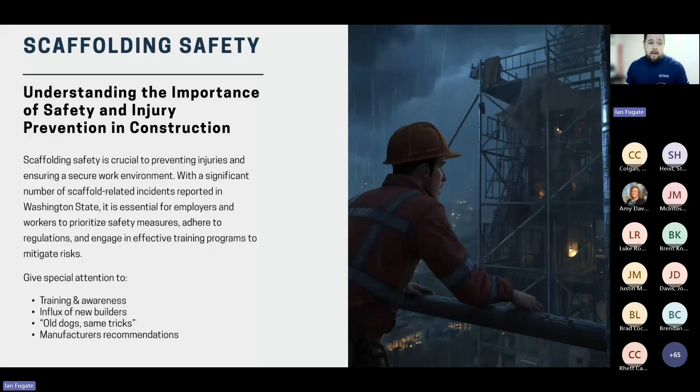And we're also going to talk a little bit about manufacturers' recommendations. It's something that I was talking to Steve about before this presentation, making sure that we understand that there are set standards that are separate from OSHA and L&I that these manufacturers have, and sometimes the guys don't follow it. And we'll touch a little bit on that, but one of the biggest things is tying off to the scaffold. Is it recommended, and does it meet the standard that we need it to meet?

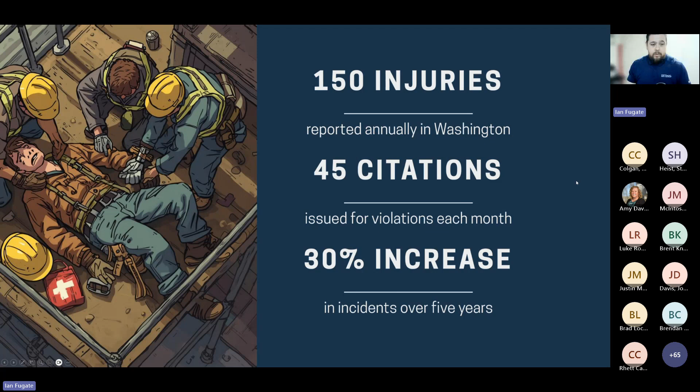Some quick statistics. Roughly about 150 injuries per year is what we see from the scaffold industry, about 45 citations every month. So it's just going to increase over time. Like I was talking about, we got an influx of new guys who are coming into the industry. I just spent a couple hours on the phone with some of my buddies in the scaffold industry, and I'm like, man, we're getting all these new guys coming in from the union. We're seeing a shift in the people who are trying to get into construction, and they see that they're going into scaffold, and we want to make sure that they're getting trained, right? Because we don't want to see this increase of 25-30% of injuries every single year. That could really put a damper on our people that are out there, right?

So today we're going to talk a little bit about hazard identification, incident and accident prevention, more of prevention than anything. I don't like being reactive. I like to be as proactive as possible.

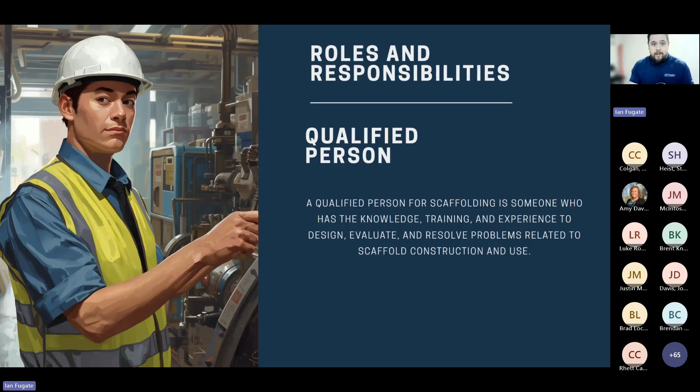They're going to work with the competent person, who we're going to talk about next, to make sure that the process is going smoothly. They're checking all the boxes and they're making sure that if there is engineering in place, the qualified person steps in and makes sure the competent person is doing it. This qualified person doesn't need to be on site, but they can be. They can maybe even double as the competent person that's there. But the competent person needs to be the one for sure that has oversight of the scaffold building process and makes sure that everything is getting done right.

And one industry where I definitely see a lack of competent persons is masons, brick masons, guys who are coming out, putting CMU walls up, and they're getting up there. The scaffold doesn't look put together properly, or they're missing guardrails. These guys don't have that kind of training. So we want to make sure that we're getting in there, asking those questions when we see the scaffold go up and say, hey, you know what? This doesn't look right. Who's your competent person?

Let's ask those questions, let's get that experience. On my current job site, a lot of people say, hey, this is our competent person, they have the experience, they have the training. But you get out there and think, I don't think this guy is qualified, let me ask some more questions. We don't want to get to that point because once they're on the site, you don't have that time, we're trying to balance production with safety. So you don't want to be backtracking. It's something you want to be very upfront with.

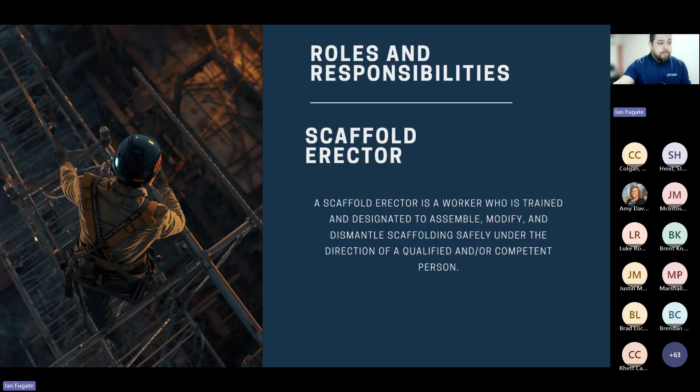All right, let's get into some violations. Fall protection, number one, right on the scaffold. It's one of the most cited things for scaffolding, not having the proper fall protection in place. What does that look like? A lot of the time they're missing guardrails, especially with bricklayers and masons, they don't have enough guardrails in the area. Personal fall arrest systems: anything after 10 feet, we need to make sure they're tied off somehow.

Is that supposed to be on the scaffold, or is it supposed to be independent? It really depends on the situation. We'll talk about that more, but there aren't many - actually I've been doing some real digging - there's no scaffold manufacturer that recommends tying off to the scaffold as a feasible means of fall protection. They really want you to be independent. The QR codes I have at the end link to two of the largest scaffolding manufacturers' building instructions, and in there you'll find it says we cannot say this is going to hold you, you should not do this. That's a big warning sign.

Independent lifelines are one of my favorite things to use, but what do you get? You get met with excuses - well, I need to tie off to here. Well, prove to me that it's okay for you to tie off to the scaffold. Don't be scared to ask those questions. They're in your field, you hired them to come there, and you need to feel comfortable asking, hey, I need to know that's going to hold you if you're going to tie off to it. Nine times out of ten, for a basic scaffold project, the frames or scaffold structure are not going to be enough to hold them if they suffer a fall.

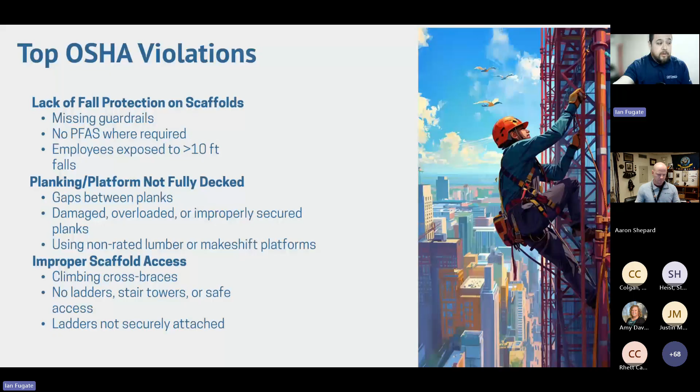Scaffold not properly supported. This is something that I have some photos of this. Especially right now, we need to make sure that if the scaffold is set on like a muddy surface or a surface that's going to absorb water, got to pay attention to erosion. We've got a ton of rain right now. So if you have scaffold on your job sites, you have any water runoff coming from the tops of the building, maybe there's a drain pipe that's near the scaffold, we definitely want to make sure that we're checking and inspecting that.

Scaffolding can't just have the base plates, the screw jacks, can't just sit on the muddy surface. If it's on concrete, we're probably okay. But we really want to see a mud sill underneath of that. And that mud sill is going to help, one, distribute the weight, and two, give that extra protection so that it doesn't slide around. The wood meeting contact with rougher surfaces like ground, it's not going to slide as much. So making sure that we have that, make sure you're checking it, check for any cracks.

We do not want to set on top of any kind of bricks. I see this one quite often. I wish I had some photos of it, but people will set bricks up and think that it's strong enough. The problem is they break and then it starts to settle, and then we have scaffold that can possibly collapse.

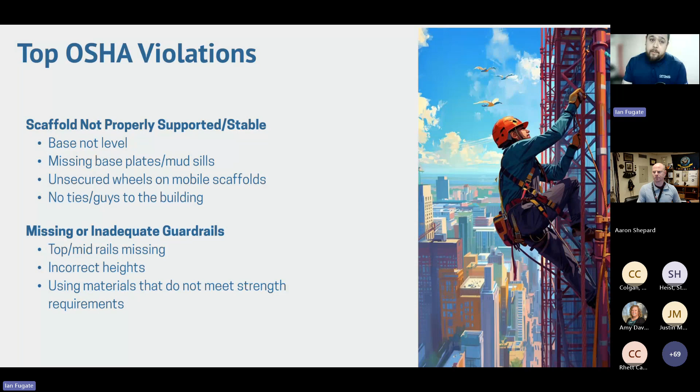Missing or inadequate guardrails. This is something very common, especially with bricklayers, mason guys. They'll only put one cross brace and then they'll start climbing and building. That's not okay. They need to have the railing in there to get rid of those fall zones in that scaffold. So we have an X brace, and it leaves this whole area wide open for someone to fall through.

And we've all probably heard these stories where someone's standing on the scaffold and they fall backwards. How did he fall off the scaffold? Well, more than likely there wasn't any rail there to catch them. They have a big X that's up here, the cross brace, but then they fall through that little area on the cross brace. So inadequate.

We want to make sure that it's there. If they can't achieve that, make sure that they're wearing some kind of personal fall arrest system: harness, lanyard, and they're hooked up to an area that the competent person and the qualified person have determined that, hey, we can tie off to here. It's good, it's strong, it's going to hold us up.

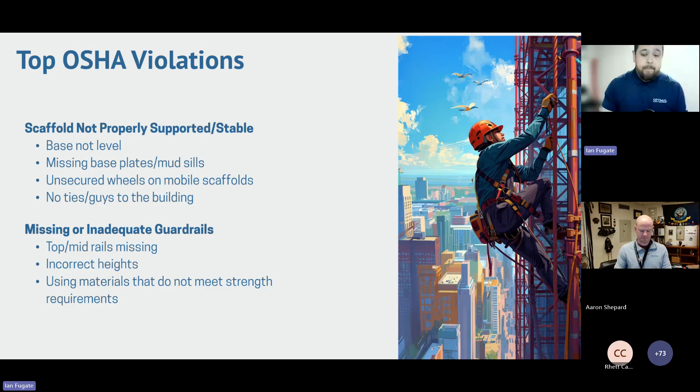Scaffold not erected or inspected. Quite a bit. There's no requirement for green tags, but there's a requirement that you go out and you at least visually inspect the scaffold every day. So we are going to cover some inspection techniques and things that I like to go over and things that I really look for when I get on the scaffold, but making sure that it's properly inspected and erected.

So number one, having that competent person, the people have the training. Number two, when you go and inspect it, you got to make sure you're looking at all the different components. The scaffolding, it's got so much.

It's like Legos for kids, and I absolutely love working with scaffold. Don't get me up more than 20 feet anymore. I'm not as limber and quick to say, hey, let's go get her done.

About 20 feet is about my cutoff now. But I do feel a lot safer on a scaffold than I do on ladders. Why is that? Because I'm usually the one who builds it, and I know what I'm looking at. So make sure that you identify that person and go over to them and say, hey, I have questions about this. Why does this look like that? Or why is this different here?

Get curious, get in there so you understand, hey, this is what it should be, this is how it should be done. And if you don't know, ask.

Overloading, incorrect load ratings here. So we have a couple different types of scaffold that can be identified by different load ratings, right? We have light, medium, and heavy duty. Light duty scaffold being 25 pounds per square foot, medium being 50, and heavy duty being 75. Where you see this a lot is they will overload.

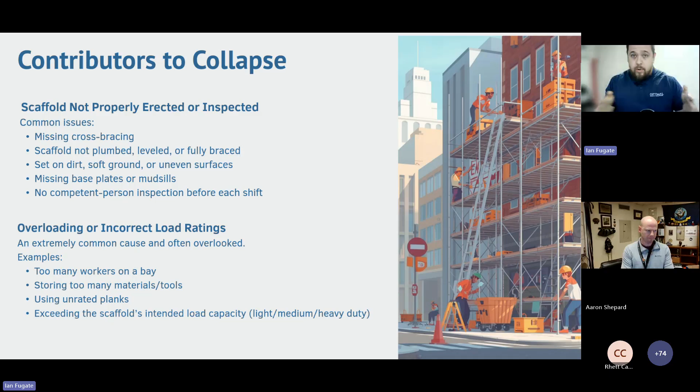Tying off. OSHA says, hey, you got to have a 4-to-1. So if we're a 5-foot wide scaffold, that 4-to-1, that first tie-in needs to be at 20 feet. Now, there are ways we could build and construct the scaffold to make it a little bit wider on the base so we can get up a bit higher before we have a tie-in point. Or maybe we use that as an outrigger where we could set the scaffold a little bit wider, kick up some tubes, and get it to be a really nice structure.

Some structures that we may work on, you might not be able to tie into the building. Specifically in Seattle, there's been some historical buildings that I've done work on. There's only certain areas we could drill in, and it tends to be into the mortar in between bricks. And we don't know how strong that it's going to be. We don't know if it's going to hold up too well.

So we want to make that structure a little bit wider so we can say, hey, the scaffold's supported. We're checking two boxes. We're securing it to the building, and we're giving it some extra structure so it won't tip out away from the scaffolding.

Improper footings, we've kind of already talked about that, so please get out there today. If you do have some scaffold, check those footings, making sure that they're good to go. If you want to send me a photo, my phone number's at the end, we'll attach it.

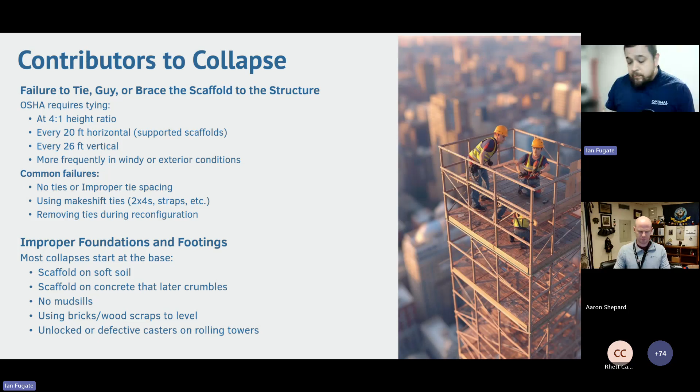Prevention over correction. So being preventative, right? Being ahead of the game. We want to make sure that we're looking at a lot of different things. So you see some photos on here, some of my inspections that I've done over the years.

Number one, live load, making sure that the scaffold is not overloaded. And we'll talk about this picture specifically here in the next couple slides of how this was overloaded. It's a very unique instance because it's something that went completely overlooked from the team that actually built the scaffolding out there. Earthly elements, so this is going to be rain, high winds.

I know in Seattle and a lot of other areas in Washington, shrink wrap or debris nets get put up on the scaffold. They're attached to it, so what does that do? It creates a huge sail for that scaffold, and next thing you know, the wind picks up. I've been on a few projects downtown where the wind's picking up and we get a call, we come out there and the scaffold's starting to bounce around. You're like, oh my God, what's going on? How do we fix this? At that point, we should have never even gotten there. We need to say, how do we make sure this does not happen again?

Stable ground and surface underneath. This picture really gets to me. This went completely overlooked. The general contractor on the site said, no, everything's good. You can't tell too much from this picture, but that end of the trench was about 4.5 feet from that scaffold leg, and they were still planning to keep digging in as close as they could. I stopped them. I was driving back from Taco Bell and rolled up and said, why is there an excavator next to my scaffold right here? I pulled up and saw this and was like, oh my God, we can't be doing this.

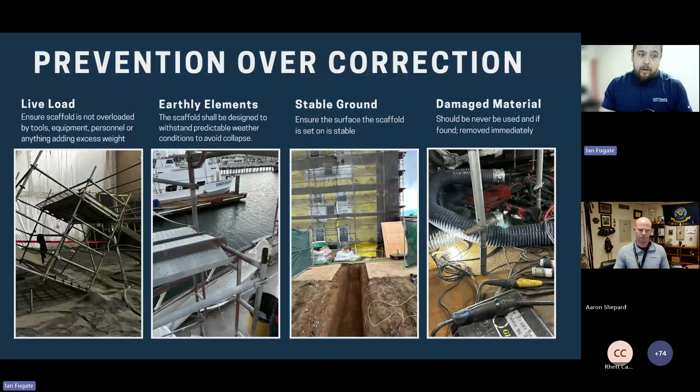But right here, we have something just describing the photo. This is a scaffold leg for a system scaffold that comes down. It's sitting on what we call an extension jack. The extension jack is not made for a base jack. Base jacks have a square plate on the bottom and then either a screw extension or they're able to come up through the tube. This one is made to sit on top of that. Mainly, these would be used for rolling tower scaffolds. It would sit down on top of a caster and you would adjust the height to where it needs to be, and then you're good to go. But that's not the application it was used for, and it was damaged.

So when you don't take action, things happen, right? 2 o'clock in the morning, I got a phone call. We've got really high winds on one of our boats, and the scaffold is starting to damage the boat itself. The client's getting a little upset. I pull up on site, and this is what I see.

The scaffold had gotten picked up, torn up, thrown around. It's missing pins. They used a gravity pin, just a lock that goes between the two scaffold frames like this. They had them in there, but the plastic was beating against it and knocked some of them out as well. So if we know weather is coming up, we need to address it quickly. We need to scan through our jobs and say, hey, I've got scaffolding here, I've got this here, this type of stuff can happen. We want to put eyes on it early and often.

As you can see pretty quickly here, it doesn't matter how strong this scaffold is or how heavy it is. That sail picked it up, and in the photo on the right, tweaked the frame so much that the planks were falling off of it. This was one of the nicer photos—there's some stuff on the other side that was really bad.

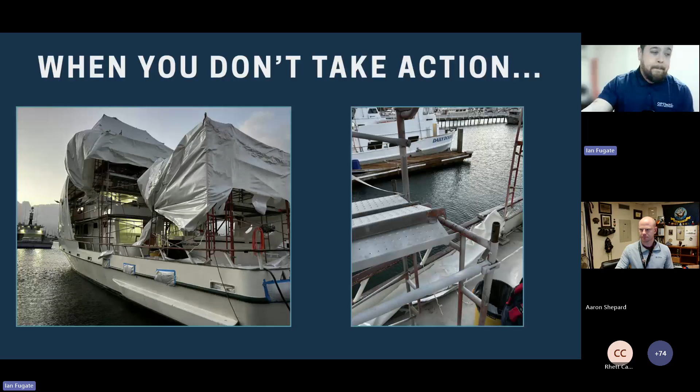So they should have had some kind of counterbalance coming back. I recommended to my team, since I was working for this company, that we get some eco blocks set back over to the right, cable down, and get some extra support on there. There's nothing holding us up. Or maybe we put some support up underneath, like a shoring situation, so it doesn't tip over. They said no, they're only up there doing a little bit of welding, they'll be okay, yada yada.

And then I ran into issues with the general manager—we've all had those types of fun conversations. A month later, we get a call. There's an accident. They thought it was the scissor lift or the boom lift that had struck one of the sandblasting hoses, which came down, pulled it, and yanked the scaffold down. That was not the case.

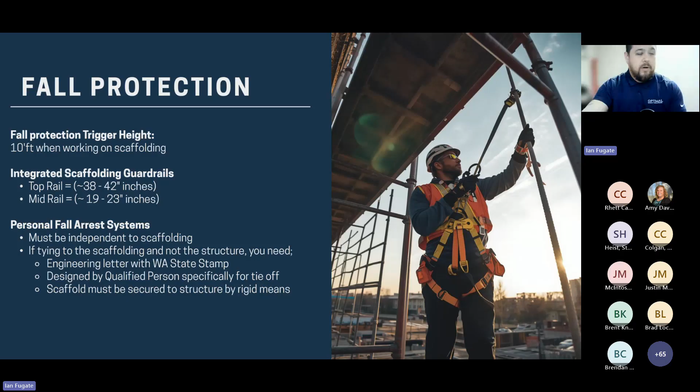Scaffolding inspection procedures, just some things that I like to take out when I go out and do scaffold inspections. So I start from the ground up. I don't always look up. I mean, I'll look up when I walk to it to make sure I'm not walking underneath of anybody. But I start on the bottom. And the reason being is because if you don't have a stable surface, the entire scaffold is compromised at that point. So making sure it's firm, you've got weight distribution if it's a little bit muddy.

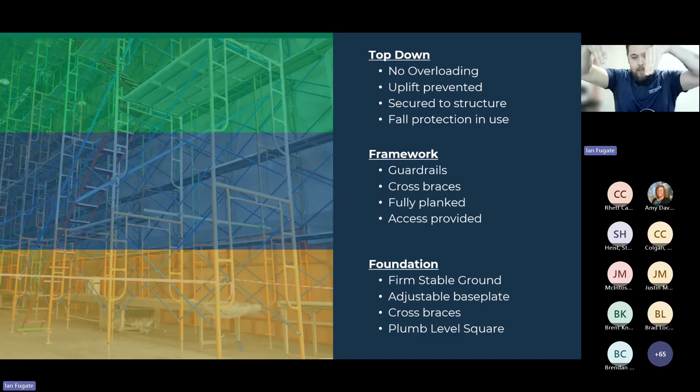If we're set on top of I-beams, which is something we do commonly, making sure that it's secured, not sliding around, because the metal plates and the screw jacks or the plates that they put on it to hug that steel beam, it could still slide around. So we want to get some clamps on there. Just a simple C-clamp could hold that in place. That's totally fine, but we want to make sure that that's there.

I'm looking for the cross braces. When you look at a scaffold, especially in this picture, I know it's got some different colors here, but each scaffold in between each upright is called a scaffold bay. And we don't want to have more than 2 bays of scaffold without a cross brace. When it's more than 2 bays, we have a problem. That means we have a dead leg, and then it could shift and float around. And that's going to make the scaffold tip over in either direction, and that's a big problem, right? If that one buckles and the scaffold frames buckle in, that area of that scaffold could collapse, if there's not too many things that are going to hold that in place.

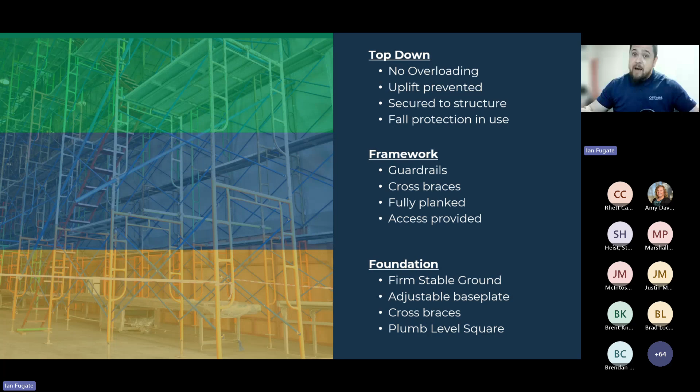As we work our way up the scaffold, I'm looking for guardrails. I'm looking for planks to make sure that it's fully planked all the way around. If it needs toe boards, because we have an area where there's a lot of people walking around or underneath the scaffold, ensuring that those toe boards are up. Access is provided. You can use an extension ladder, make sure it's 3 feet past that platform, and hopefully a swing gate that's there to prevent them from falling off as they enter and exit that scaffolding.

And a little bit higher up, making sure that we're not overloading the scaffold again. Uplift is prevented, so some kind of a bolt system if you have debris nets or shrink wrap in there, and making sure that the guys who are building the scaffold are using some kind of fall protection system.

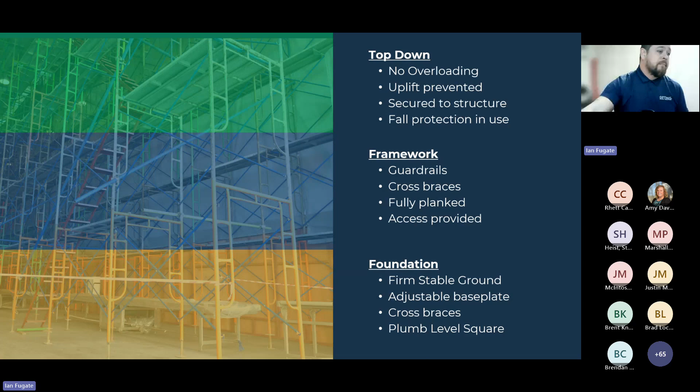So we're looking for specifically erosion, soft soils, any frost. So as we get deeper into the winter, it's going to get a little bit colder. And then right after that, we get some warm temperatures rolling into the spring. That's an area that gets missed quite a bit. So if you have scaffold sitting on your site for a period of time, definitely something you want to go check out. Make sure that it's good to go every single day.

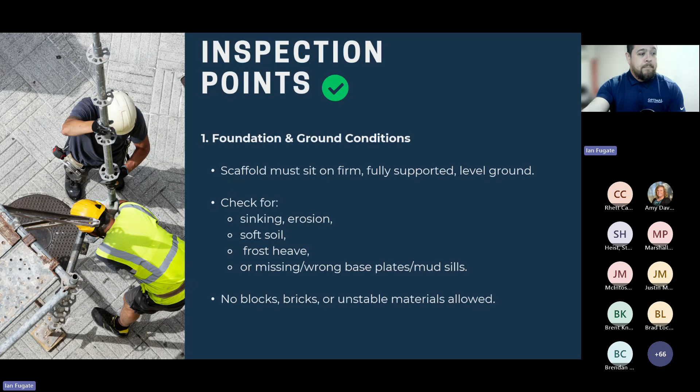Again, back to no bricks, no unstable materials. We want to make sure that the stuff that's underneath of it is secure and strong enough to be able to hold it. Base plates, mud sills need to be under there as well. Leveling jacks. When you look at screw jacks, they tend to be about 24 inches long. In there at 18 inches, there's a notch. That notch is to prevent the erector from pulling that thing up too high, and then it's not stable anymore. So if it was a tip, it could pop off of that scaffold screw jack. We don't want that.

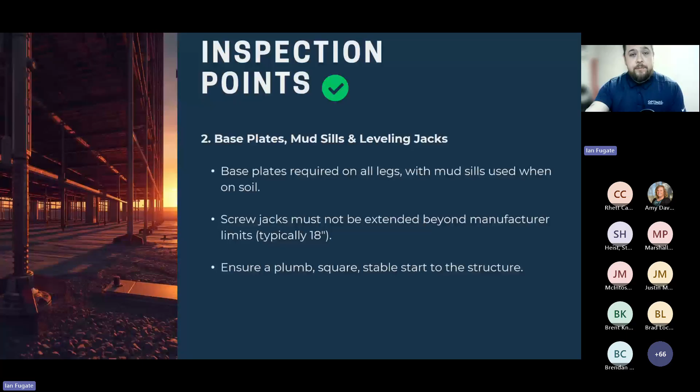All right. Ensures plumb, level and square. I'd say 95% of the companies that are going to come out, build the scaffold for you, your big box contractors, your Safway, your BrandSafway, PCI, Sunbelt, these guys, they know what they're doing. Make sure it's done right. They know what they're looking at when they get out there, and most of the time it is done properly. Where I see some of those faults is from subcontractors, and we're going to talk about common fail points here in a second. I know we got about 10 minutes on the clock, so we're going to keep going here.

Vertical posts, okay? So all the framework, making sure it's in place. You see any bends or sways in that scaffold, you're going to definitely want to check that out, all right? And also when you look down the scaffold run, it should be pretty damn straight all the way down. Now, if you have some pop-outs in the building, obviously it's going to be there. But if you have a straight run of scaffold, you should be able to look down it with the eye and say, you know what, everything's in place. If you have some frames that are starting to lean out at the top, scaffold's not level, and we need to address that as soon as we can, right?

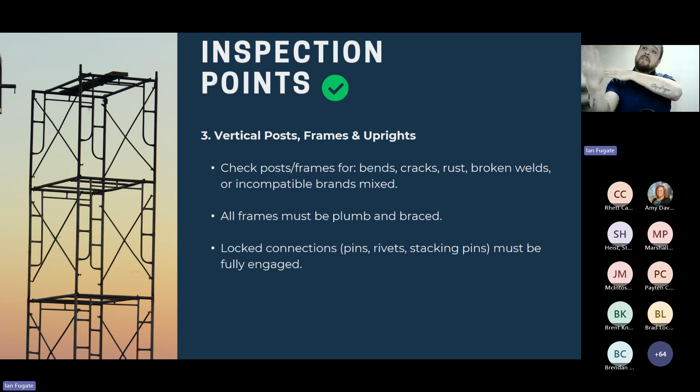And maybe that comes from the compression tie was pushed in and the scaffold's leaning. Maybe something happened where the frame got lifted up and is now sitting on top of the scaffold frame and not connected, not coupled. That happens quite a bit. I've experienced that where I had a scissor lift, somebody's working on a scissor lift below me and ended up catching the end of a scaffold brace and lifting up the scaffold while I was standing on it. And I was like, hey, why is the scaffold? This is not supposed to happen. Looking around, look down, well, there's a guy lifting it up, okay? So checking out for that kind of stuff while you're up there.

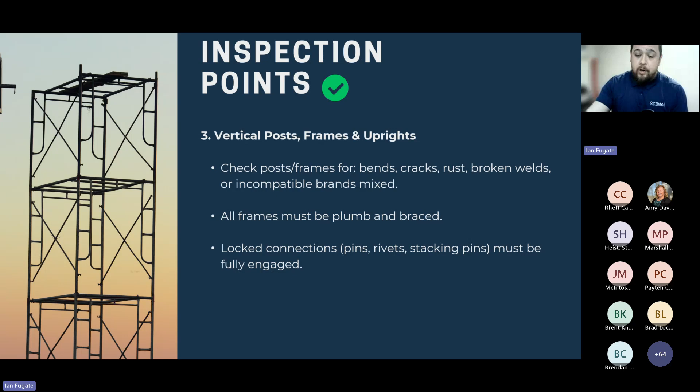Cross braces, we talked about it. No more than 2 bays need to be separated from a cross brace. We want to make sure it's there. That cross brace is the structure. Okay, the rails don't really do much except provide fall protection for the people who are working on the scaffold and maybe to keep something squared up in the backside. But the real structural part of that is the cross braces.

And we want to make sure that, number one, they're not bent out of shape. You'll see a cross like this, and then the bottom leg is bent over like at a 90-degree, and they're still using it. I'm like, hey, that's not how that's supposed to work, right? We're supposed to have good, clean material, undamaged. It gets up there. Really good competent persons, really good erectors will say, no, that needs to go back down. I can't tell you how many times over my career where stuff will come up and I'll look at it and be like, nope, send it back. And that's the attitude that they need to carry.

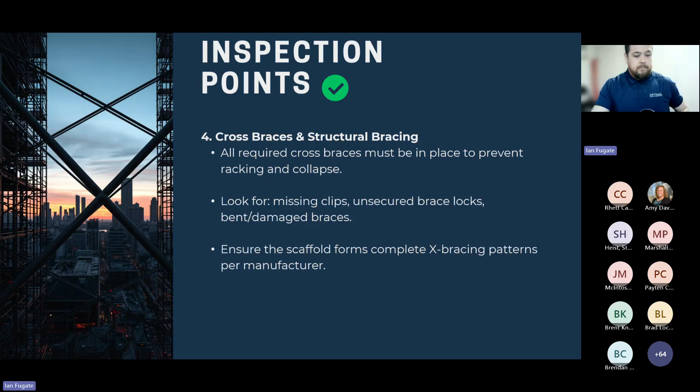Platforms, they need to be scaffold grade planks. Steve, we've had these conversations before. What is a scaffold grade plank? Or you see the OSHA approved stamp on there, and that's not a thing, okay? We need to be able to make sure that that scaffolding plank, whatever kind of wood or material that it is, that it's going to support the load that it's intended for.

So if it's a light duty scaffold, it has to be able to support that 25 pounds per square foot. At that point, maybe a shorter scaffold bay with a 2x10, maybe that does work for that. But if we start getting into wider scaffold bays, 7 and 10 foot wide, and now we're putting these same 2x10s there, that might not work, right?

Scaffold plank, true scaffold plank, is laminated. So you'll have different layers of it. They're pressed on top of each other, compressed down, and then this makes our scaffold plank. So if it cracks, okay, or we have some flexibility in there. So if some of it does get knocked around and broken, we're able to identify hopefully sooner than later. How do we look for those different types of things that are inside because it's layered?

We knock on it. Okay, so good guys will knock on it and be like, okay, this sounds a little more hollow. It sounds like something's there. Maybe they give it a flex when it's going up. Those are the things that those qualified people and the competent persons should be looking for before it goes up. I know wood plank is not a big thing here in Washington State, but we want to be looking for those cracks that might be in there as well.

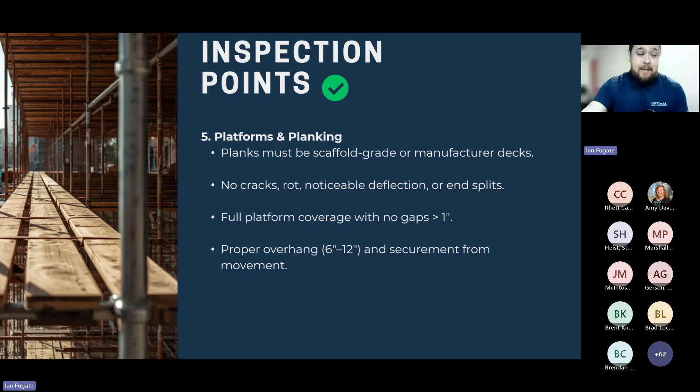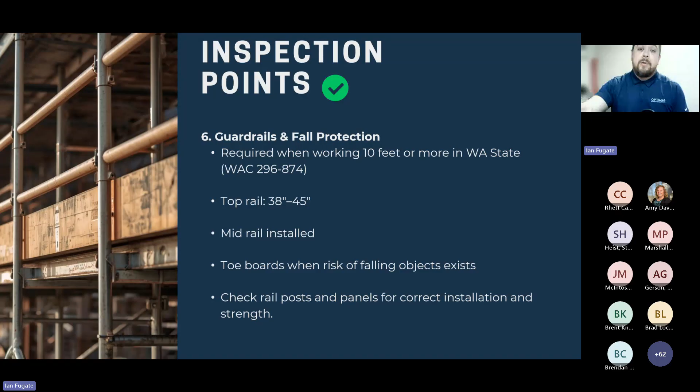Typical guardrail, making sure that you have some kind of a top rail on there. That top rail needs to be at about 38 to 45 inches above that platform. Mid rail installed at 21 inches from there. Toe boards, if anything can fall off and you have entrance and exits to the building, making sure that that's toe boarded out. You could even build some scaffold out to give a canopy to give better protection for people who might be going in there, similar to what we would use for like a pedestrian canopy.

Ladder access, making sure that you have it up, it's secured. I have a couple photos here and some other slides, and we'll bang through it real quick. Making sure that it's complete, all right? And then they need to break, Steve, correct me if I'm wrong, but I believe it's 35 feet. That they need to have a break in scaffold in that

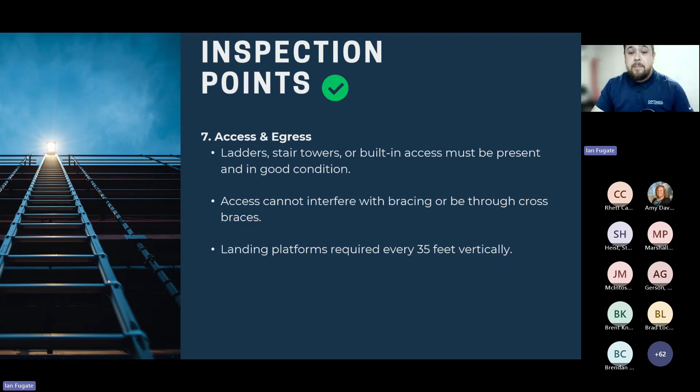access ladder to the top, because we don't want people climbing 60, 70 feet up on the same ladder run. We need to have some kind of a break there. Even if that break comes off into the scaffold and you walk over one bay and you climb up, there needs to be somewhere, some kind of access that they can break off and get onto a secure platform.

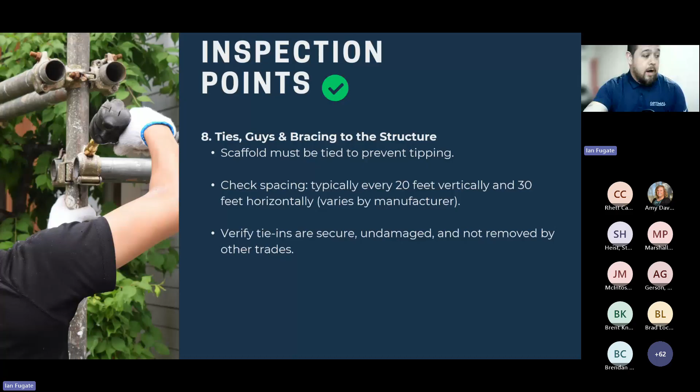Ties, guys, bracing for the structure has to be there, right? And like I said, we can make the scaffold a little bit wider to maybe help give it support if you can't tie to the structure in a certain area. Definitely something a qualified person, a competent person needs to identify and call out first, early and often. Load capacity, we've already touched on that a little bit.

Weather, again, this is such a big deal. I know everyone in this room has probably seen a video on LinkedIn or on TikTok or something. The scaffold's blowing and then you've got all the shrink wrap going everywhere and you're like, oh my God, it's going to fall. And it does. Okay. Right now is that time of season. We have to really be vigilant about getting out there and making sure that that stuff is done.

When you have a scaffold get put up, walk through, check with the guys. Too many people don't walk the scaffold with the erector, with the competent person and the foreman. They just say, okay, everything's good. All right, great. And they walk away. Like, wait, where'd you go? You need to come back. You need to go over there and say, hey, okay, where's my access points? Can we climb the scaffold? Make sure everything's good, right? Make sure you're having those conversations.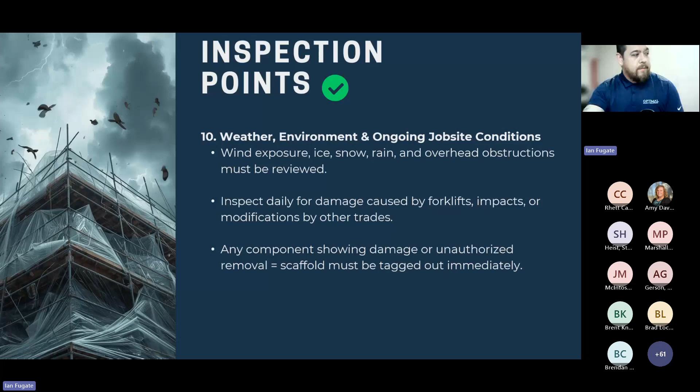All right, let's get into subcontractor fails, okay? Well, fails. L&I doesn't like the word failed, right? But it is a failure, right? And these things need to be identified. These are the most common things that I see out there.

Subcontractors, number one, a lot of them are not trained on scaffold user awareness. That is a very critical thing that they need to be doing. Getting that awareness to say, hey, I can be on the scaffold. I need to use it this way. I cannot use it this way, right? I can't remove the guardrails. God, I could ask for a hand raise right now.

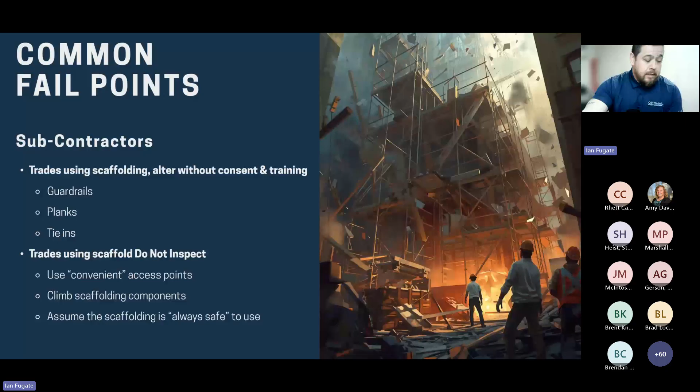Trades don't inspect the scaffold often, like ever. Most of the time they usually just walk up and say, hey, it's good to go. We don't want that either. They also climb the scaffold components, and they just assume that it's safe and good to go. That doesn't mean the erectors are not at fault too.

They tie off to the scaffold, number one, and they climb the scaffold components. Now this is approved by certain manufacturers - Safway says you can climb the couplings, as long as you're tied off you're allowed to climb those types of scaffolds. But a lot of manufacturers won't. So when we get to the end of this, make sure you screenshot that, get the QR code, so if you do have those types of scaffold out there, you know if they're allowed to do that.

Erectors tend to miss plank. They don't put enough up there, they don't put enough plywood up in that area. We want to make sure that's put on. And the same thing goes for uplift - they're not putting pins inside.

Process and setup: making sure if you are building or dismantling the scaffold, there is a CAZ set up. We don't want people in that area - own that area. Tell your guys, hey, they need you, this is where you're building, don't let anybody in. Get the signage up, get the danger tape up, make sure no one comes in there.

I can tell you how many times some piece of scaffold will come down and hit somebody that's not even involved with the scaffolding job, or it'll lean over and fall on top of somebody. I've had people drop stuff on top of me - shattered my forearm, out for six months, and couldn't build the same again after that.

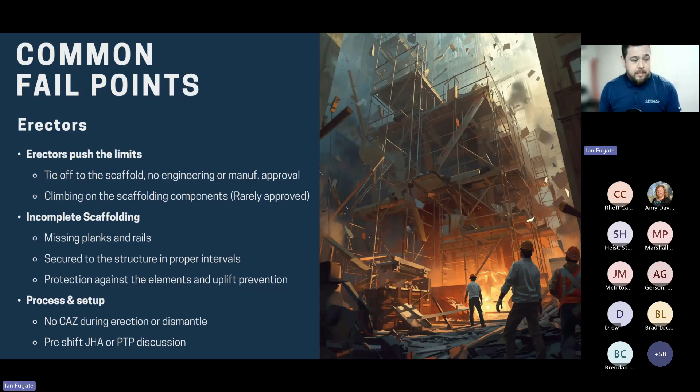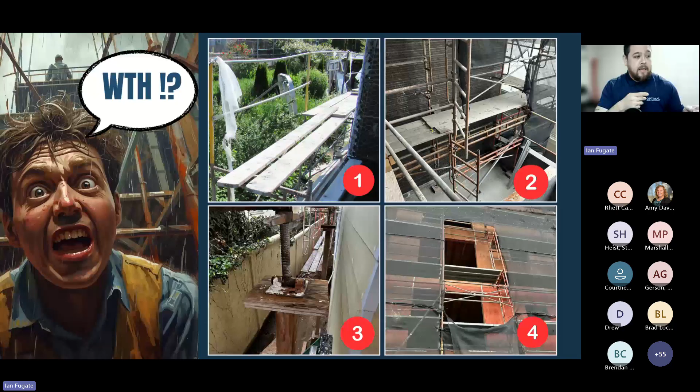All right, so we got some tips on here. If you have the time, let's screenshot these. Like I said, I will provide the...